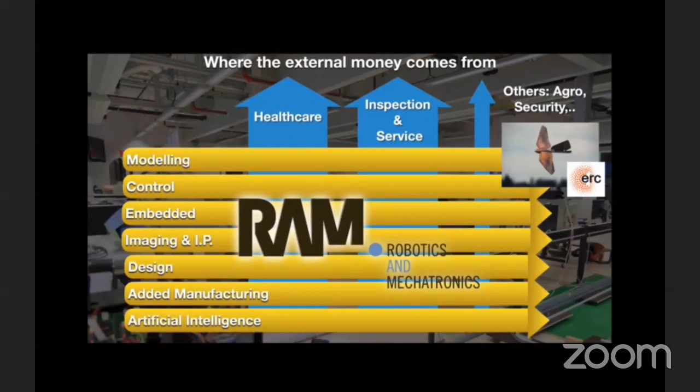This is a glimpse of the activity. We have a broad spectrum from very conceptual work to very practical work, completely domain independent - think general software architecture or conceptual system and theoretical developments - towards something very much related to a specific field, like if you work in the medical field you really need knowledge about the field itself. We have a lot of activities which have been recognized with awards and patents, from which we've also started a number of spin-offs. But I will not talk about this stuff in this lecture.

I want to first reference a colleague from Stanford to introduce what I want to talk about. Nowadays everybody's talking about AI, artificial intelligence, and very often the general public doesn't even know what it's all about. Already in '88, Moravec and colleagues from Stanford made the statement that it's actually relatively simple to automate things which humans think are very complicated, like playing chess or Go recently, but it's extremely complicated to create machines that can repeat very simple tasks that babies do when they are born.

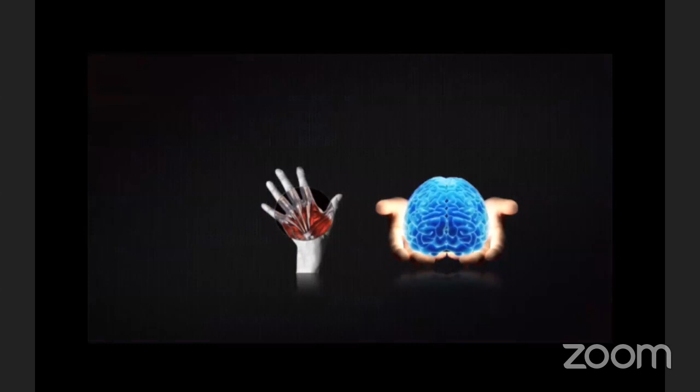And of course, the real sweet spot is what I call physical artificial intelligence, which is exactly the intersection of AI and robotics, where the two things, the computation and the physical interaction, meet.

Talking specifically about robotics, it has passed from its early stages in which we had machines that were stiff, high speed, and the environment was very structured, very far from human, to a situation in which we really need machines that are mechanically compliant. The design intrinsically has to be mechanically compliant. It doesn't have to be often very high speed — low speed is enough — but completely unknown environment and interaction with humans.

In order to tackle this kind of problems, you really need to think differently. You need new control strategy, new actuators, new materials, new performance measures. And the safety for human interaction starts becoming a major concern.

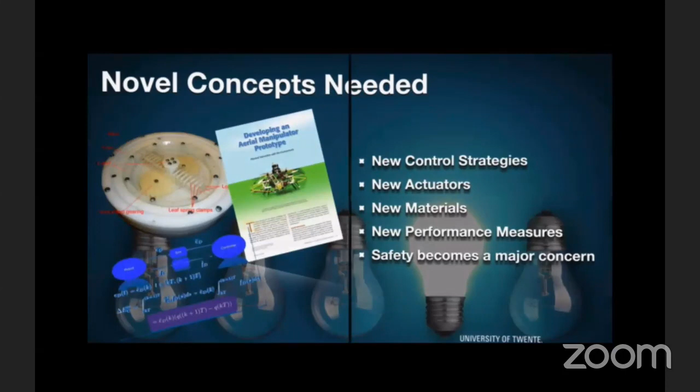And at the same time, if you look at birds — and I will come back to that later in my lecture — birds are amazing. If you compare this with some top planes that have been developed, like the Blackbird, which is probably one of the fastest planes available, it actually flies at 32 body lengths per second. A swift, which is a little bird, can fly at 140 times its body length per second.

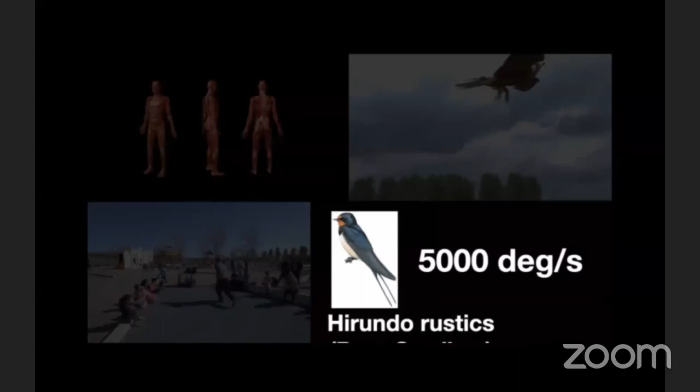And also concerning agility, if you consider the Douglas A-4 Skyhawk, which has a rolling rate of 720 degrees per second, there are barn swallow birds that have a rolling rate of 5,000 degrees per second. So you see that the way to interact with the environment — we are far from being close to having reproduced that.

So what I want to try to bring you is really a paradigm shift.

This is just a little game that I play all the time when I give this kind of lecture. This device is called the dovetail. You have basically two parts, the red and the gray one, which can move relative to each other. It's used in all kinds of appliances. You have 1 degree of freedom that's free to move. All the other 5 degrees of freedom are constrained, because two rigid bodies are connected by 6 degrees of freedom totally, which are constraints.

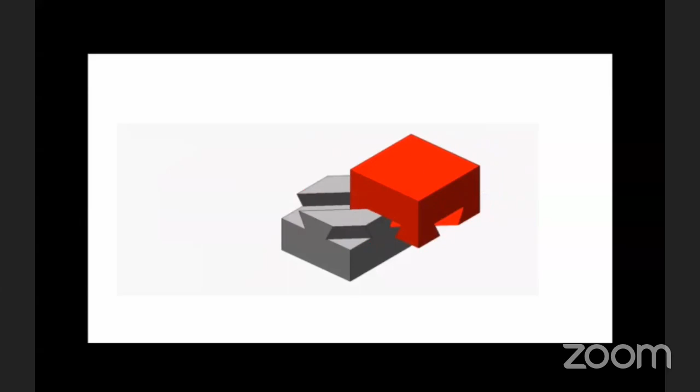So then I ask, most of the time: can these two parts now move with respect to each other, the red and the gray? I'm pretty sure a lot of you are thinking, oh, they cannot move like that. Well, it turns out that definitely is not the case — these two parts can move. And of course, I ask, besides the symmetric rotation of 90 degrees, are there other ways that this could move? And the answer is, again, yes — there are many, many ways this could move.

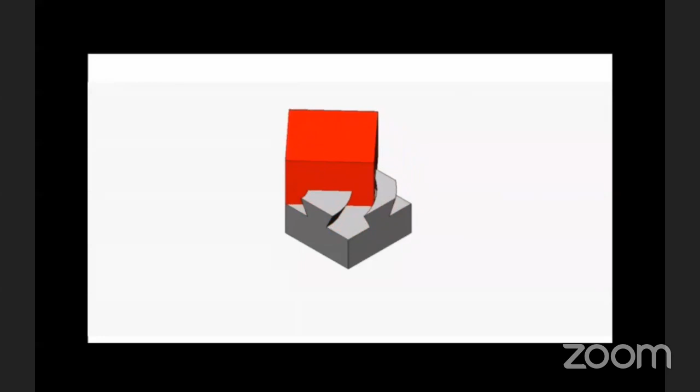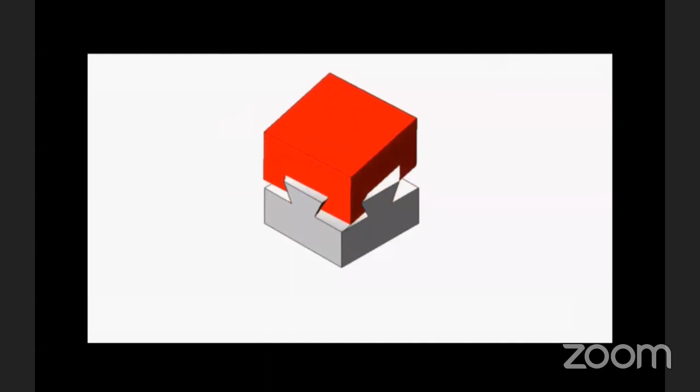For example, what you see here is one of the other kinds of motions, and actually there are many more motions that are possible. What I'm trying to show here — and this is yet another one — is that what I want you to try with this lecture is to break out of your patterns and try to think out of the box.

Because what happens in what I just showed you is that you see things, and you are trained in a certain way, you see things in a certain way, and it's very hard to get out of that way of thinking. So in the example before, by looking at the surface, you directly draw conclusions about the whole volume of the two objects, which of course are not the case.

So that is why I wanted to show you this. And what I want to talk about is interaction. So what if you want to model and control systems that interact with the physical world?

I would like to cite Ludwig Wittgenstein, who made a statement which is pretty well known: what we cannot speak about clearly, we must pass over in silence. This is something a lot of politicians should write on their bed, because a lot of statements are made without basic knowledge of science. But I mention it here because to talk about robotic soft compliance, interactions, impacts, and all the things I want to address, we must use the right tools and language.

And I am absolutely certain that physics-based, port-based, and energy-aware methods are the things to be looked at in this case.

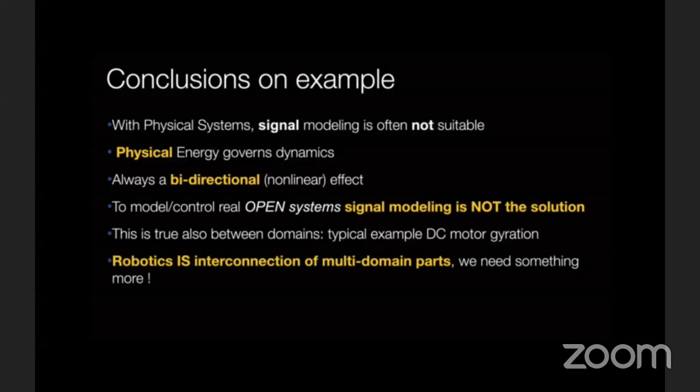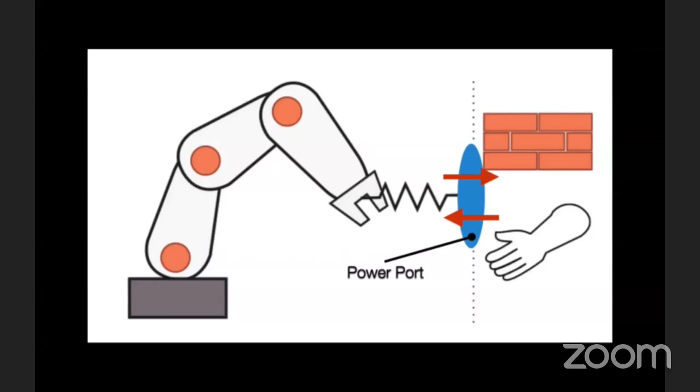And especially in robotics there is interaction of multi-domain parts, so you need to tackle things differently, and you need the concept of what is called port-based way of thinking. So this is a schematic idea of a robot, and the robot interacts with the world—it can be a wall, can be a hand. The power port is basically the concept you use to describe the interaction between the two systems, and as indicated here with the red arrows, it is always bidirectional. It can never be in one direction only. So what is a power port?

If you consider now a controlled robot and the environment it touches, these two arrows will be represented by what are called conjugate power variables, so forces and velocities. In the scalar case, it would really be a force and a velocity. In a multi-body case, this would be Lie groups, and I'll come back to Lie algebra in a second.

The environment is, in general, nonlinear, unpredictable, and greatly varying. But once the control robot touches the environment, the connection of the two systems becomes one single system. The stability, the dynamics, everything that happens is actually dependent on both. But very often we do not know the environment ahead of time. So how can we cope with that? That's what I want to show you.

More formally, a power bond: if you take two subsystems, system A and system B, these two variables, which are basically shared by the two, are called, in general, efforts and flow. They are two elements that belong to vector spaces in duality. If the efforts and the flow are scalars, there's not really big problems. But if the flows are, for example, vectors, the efforts will be linear operators on this vector space, so it's really a dual space. The efforts and the flow can also be infinite dimensional spaces, and duality is still well defined in that respect.

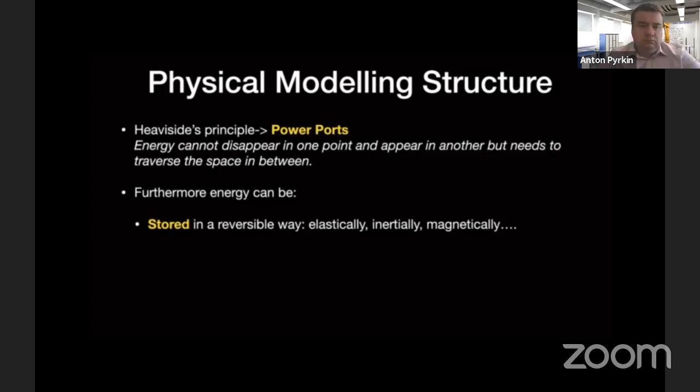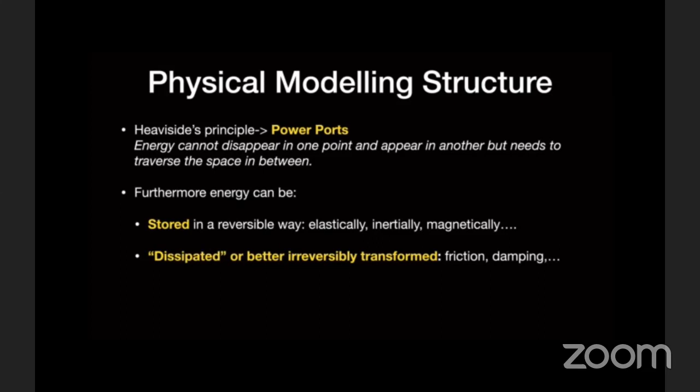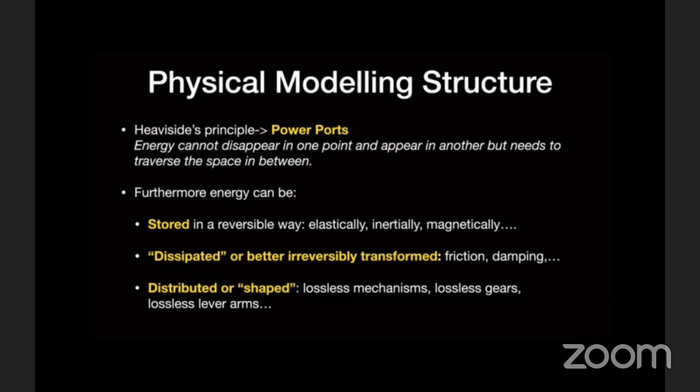Furthermore, energy can be stored in a reversible way — elastically, inertially, magnetically — or it can be dissipated, or better, irreversibly transformed. That's the concept of friction, ideal damping. Of course, energy itself cannot be dissipated, because by the first principle of thermodynamics, only free energy can be dissipated, which is a Legendre transformation of the energy. And energy can be distributed or shaped — mechanisms like transmissions, gears, lever arms are ways you can transfer energy from one part of the system to another, and the power continues. So in principle, the concept of distributed shaping of energy does not change the energy content.

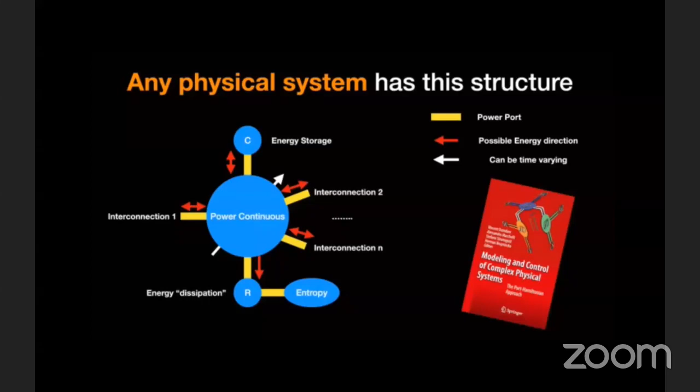So the water can come in and be stored there, or it can be irreversibly transformed to entropy. That's the R element, the dissipation, in which the water coming in cannot go back to the system and is basically stored in the entropy, which can only increase from a thermodynamic point of view.

Thanks to these things, you can model a robot or any complex mechanism as an interconnection of storage of inertia, for example kinetic energy, storage of potential energy, irreversible transformation to heat with dampers, and the rest will be interconnection.

Then you have open elements, and this is very important because it's the core I will talk about: you can couple this mechanism, this robot, to a motor, which will either supply energy or subtract energy. This is where the system will interact with the world—so there is a control port and an interaction port.

This system can then be simplified again to this blob of Dirac structure, an element which is storing energy, and an element which is dissipating energy, with two open ports which can be interconnected, in this case, to a motor and to the rest of the world.

Now I want to cite a conjecture, and this is the major point of the whole work I want to present: to ensure stability during any interaction, control needs to be implemented by interconnection, either physically or by control. There is no other way. This is the conjecture. Now let's try to understand what I'm talking about.

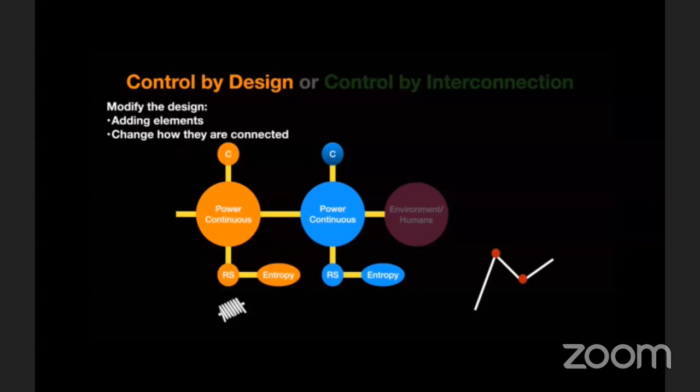In the schematic way I introduced, this would be to create another power continuous interconnection, putting other parts in which energy can be stored, maybe some other things which can be dissipated. This interconnection would then result in a new system—for example, putting a spring between these two links of this robot. This is one way to do control by interconnection; in this case, the interconnection is physical.

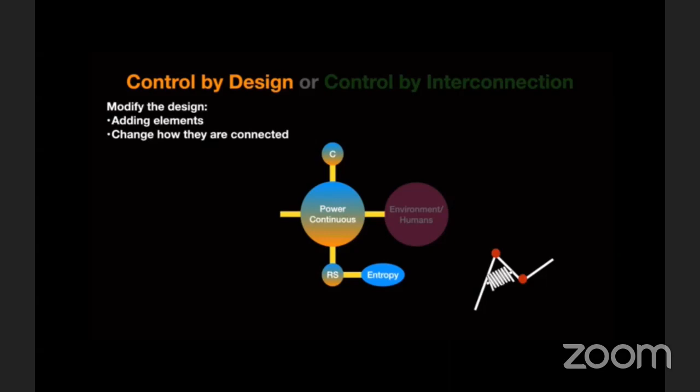Examples of this are given here. For example, this work we did with Sangbae Kim of MIT on the cheetah—one of the first designs of the cheetah—was to put a spring on the spine to create coupling between the locomotion of the front leg and the back leg and optimize the energy exchange. So you basically physically shape the robot itself. This is, by the way, something we are also doing with ITMO.

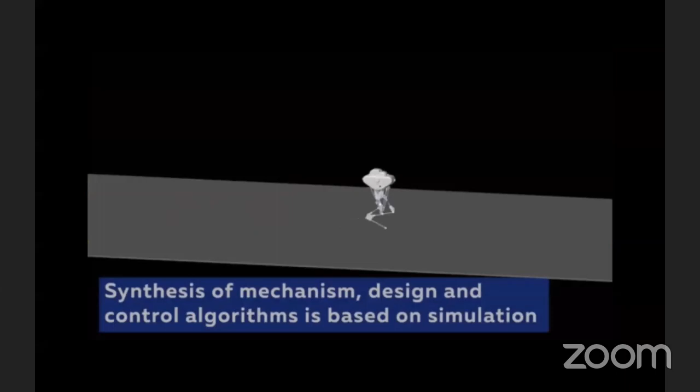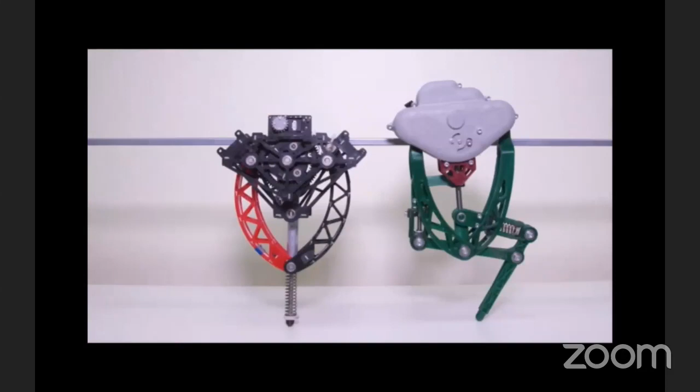So this is in the lab at ITMO. This is a design that we originally developed in Twente and has been adapted at ITMO. And this, what you see here, is developed only at ITMO. It's a very nice design in which you try to optimize it to create resonance of the oscillations. As you can see, this is the intrinsic physical design which will allow us to build a complete cheetah.

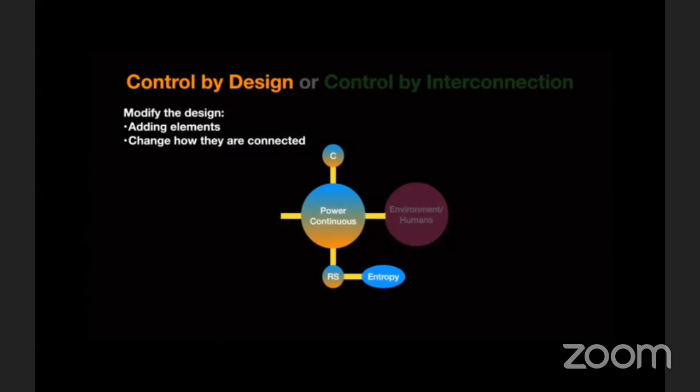So then, another way of doing control, instead of only physically controlling like this, is to say: you want, for example, to inject damping. Physically, you'd like to create damping in your system. You can easily put a physical damper, or you could build a device which extracts physical energy from your system. That energy, instead of just creating heat in a damper and being thrown away, could instead be extracted, stored somewhere, and then used again when you need it, because it would be a waste to just throw the energy away.

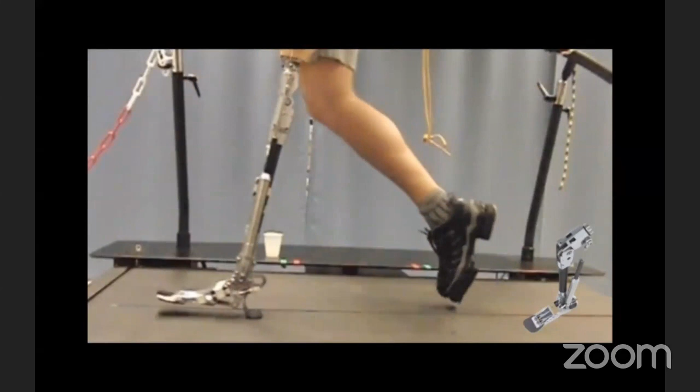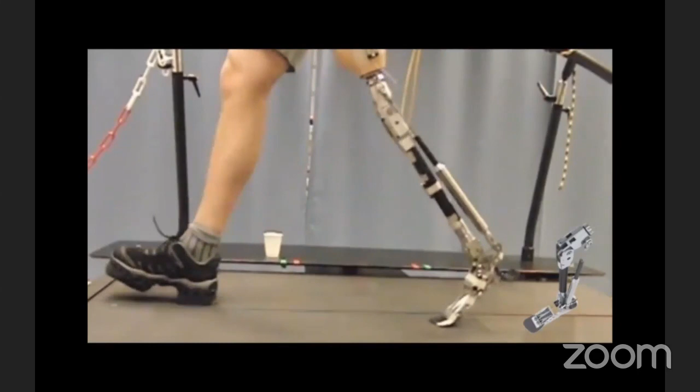This, for example, is what we developed in Twente many years ago: this prosthetic device, which is pretty unique in the world. You see this vertical element, which is basically an elastic spring. In this phase, the kinetic energy of the lower leg is stored elastically and then latched, and then in this phase it's used to create the push-off energy for locomotion. The patient, who is a transfemoral amputee, would recover 80% of the energy which would otherwise be lost. This is not done with any other knee prosthetic devices for transfemoral amputees that are out there.

So you can basically build a device where that spring behaves like a damper, in which, at the end, when it extracts all the energy, it just latches, and that energy is then reused as a storage injection of energy in the next phase when it's needed.

Another way of doing control by interconnection is by computation, right? You really want to put a controller that interacts with the system, but via the concept of the port as introduced before.

This is another topic I've been pretty active in, along with many other people active in robotics, which actually started in a European project coordinated by Antonio Bicchi, who I was part of. It was called VIACTORS, and publications in the world increased enormously during that time. Basically, variable compliance actuators are not just motors that transduce current to torque, but they can have physical internal dynamics in compliance and damping. For example, human muscles are kind of variable compliance actuators, because they have intrinsic compliance that can be modulated by the co-contraction of muscles.

Then, on the electrical side, you would have power amplifiers. And this is where things can go wrong. So basically, what happens if you have actuators, variable compliance or not, and you have power amplifiers, the power amplifiers suck the energy out of the power plug and put it into your system.

In principle, for the context of the control that we have, the energy which can be extracted from the power plug is infinite. So if you do not control the system properly, you can get instability, because the energy which can be extracted from the power plug and go through the line from the energy supply to the environment can be unbounded. And if you do that, you can have instability for the reasons said before. But of course, how much energy can be extracted is determined by control.

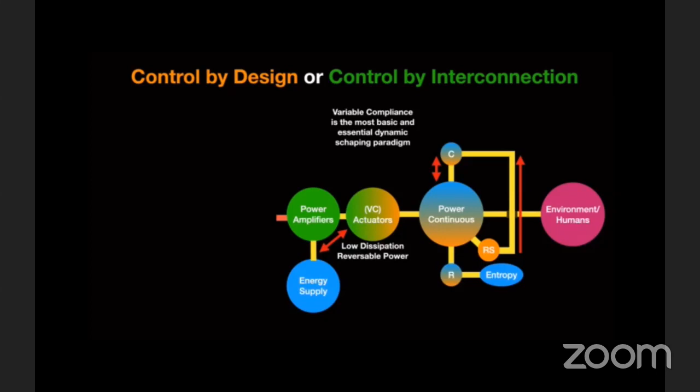So this is basically the power continuous system in which everything shown here is really pure energy. But if you go to the red kind of bonds, then you have control. Normally what people do is measure something in the system and then actuate the power amplifier. And this is, in general, not the way to do it, because you have no way of tracing how energy can be bounded and kept lower bounded from an energy supply to the environment.

So instead, what I suggest is to do it differently. Because what you want is that the virtual energy flow, which you can then compute via the red bond, should always be equal to the physical energy which you actually extract from the power supply and add to your environment. If you manage to do that, you can develop a controller that will have a lower bounded energy, and therefore prevent the environment from being able to extract an unbounded amount of energy and become unstable if something goes wrong.

So the first thing, of course, when you want to do digital control is the concept of sample and hold. And you need a way to handle this, because something can go wrong between continuous time and discrete time. It is very important to do it right at this very level, because otherwise you would lose this consistency purely due to the fact that you go to discrete time. There is a way to do that, as I'll show in a moment.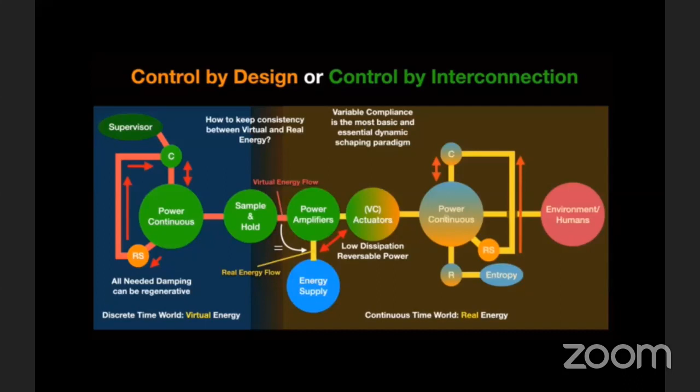Now, how can you do this? So this is the discrete time part. The gray part between the two is one important major issue, but it's very easy to solve. This is called passive sampling.

And the question is, of course, what should ED bar and FD bar be in order to keep consistency of the energy? This is the game. If we use a zero-order hold, we know that if our digital controller provides a certain value, that will be held constant for a sample interval. So we know that ED of t will be equal to ED bar of k, where k is the discrete time, for a certain interval.

Now, what is the quanta of energy that is then exchanged between the controller and the robot? Of course, the energy in the robot is physical, because you apply a physical torque generated from a current, and the physical energy comes from the power socket. But the physical quanta of energy will be nothing else than the integral of the power from kT to (k+1)T, and this will be the product of the two variables. But considering that we use a zero-order hold, ED bar is constant and can go out of the integral.

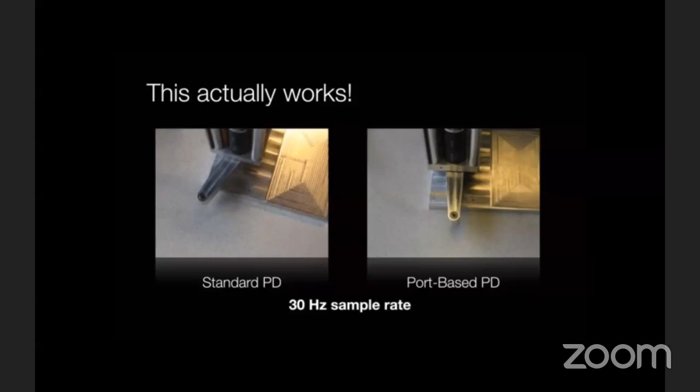And that's the key. So here what you see is something very simple that actually works. You have a 1 degree of freedom control system, kind of PD, done at 30 Hertz sample rate. On the left side it is done in the naive way using signal-based thinking, and on the right side it's done using the port-based concept. You can interact and things are perfectly stable because there is no spurious energy injected into your system due to sampling. This consistent way of sampling and actuation solves the problem at once.

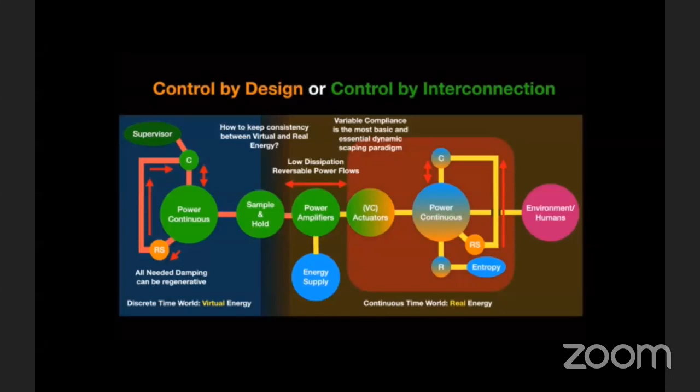Now, as I mentioned before, you can also put intelligence into your design, and this is actually the project Viactors that I indicated before. So you can basically look at the actuators and how to engineer the system and make it smarter on itself.

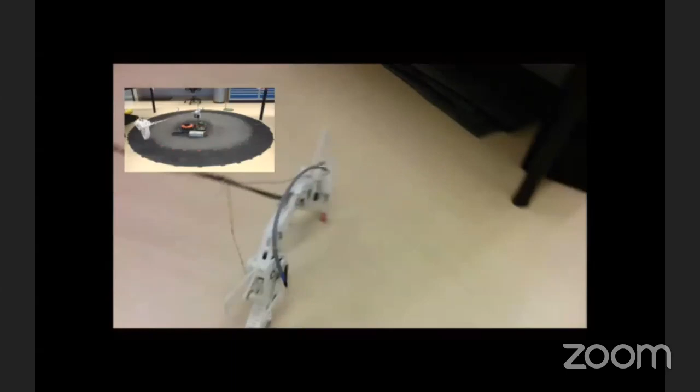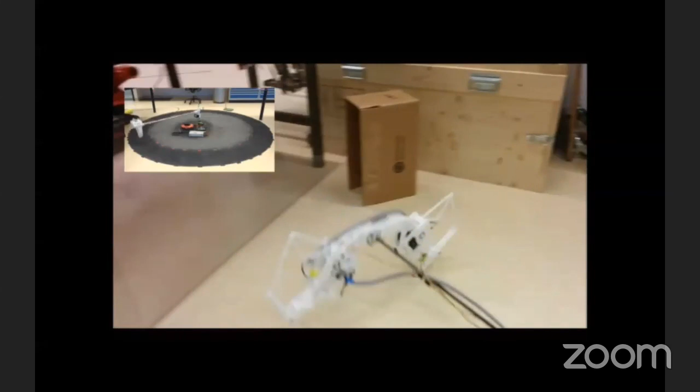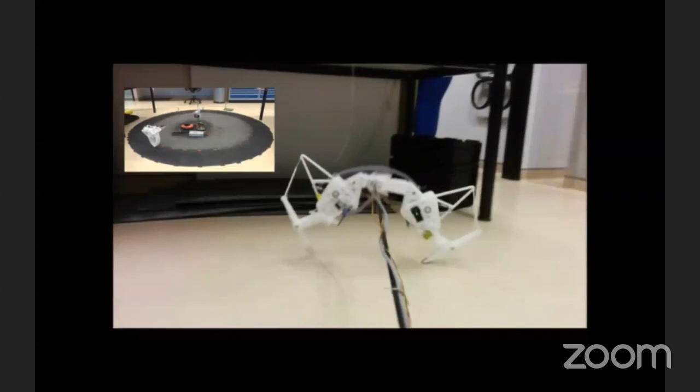And these are some of the things, for example, that we did in Twente. We are now, as I mentioned before, trying to build a quadruped version of this at ITMO, in St. Petersburg. This is a robot which actually doesn't have any control. It has a front side and a back side, with a little reaction control so that once the energy of the spring reaches a certain constant, it basically loads the spring again. There is a spine which is elastically loaded, and just by designing it properly, it can locomote forward.

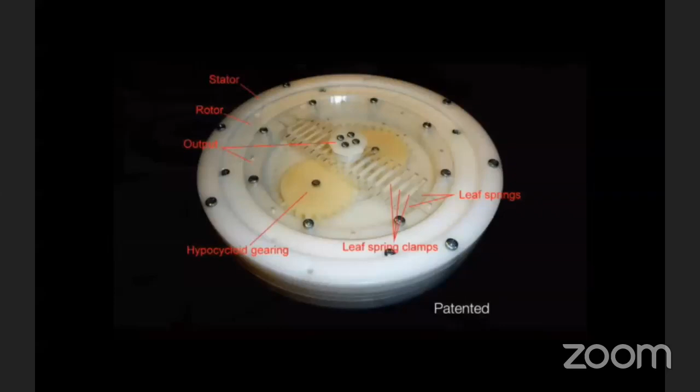You can also build actuators differently. This design depends on the flexure that you have, and it's able to change the stiffness just by, for example, moving what is called hypocycloidal mechanisms. You can then also make the clutch and release the way it moves. This is a patented actuator, a very nice design for creating variable compliance by means of design.

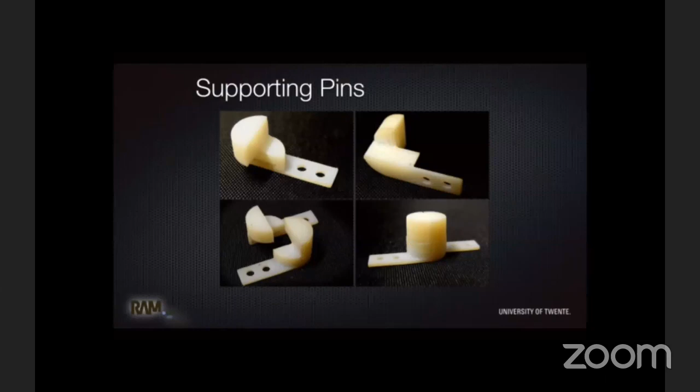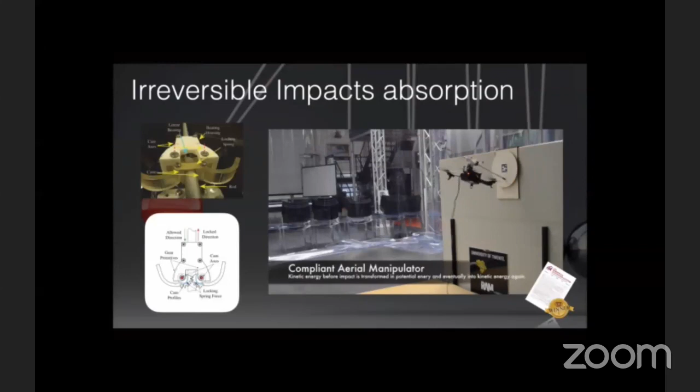And then you can also use smart design to basically create things like these drones, which actually interact with the environment and can scan vertical surfaces. So this is really a good example of smart design, or these things that can absorb impact, which was given the best paper award on Robotics Letters a few years ago, in which the system basically arrives at maximum speed without any problem, absorbs the energy, and can leave.

This methodology can be pushed much further, because with this idea you can basically solve intrinsically complicated problems in a very easy way. Suppose you have an environment - this is related to another project we run, SoftPro - in which you have a mechanism with a number of actuators, and these actuators have a bus in which they have different communication delays. You want to be able to control a very complicated system with a distributed architecture and prevent it from becoming unstable.

Well, there are ways to extend all this paradigm so that if you would build, for example, a humanoid - a very complicated robotic system with a lot of actuators - you would be able to ensure stable behavior with any passive environment in a certain way, even if you have multi-sampling, time delays, computational jitters, and all these kinds of things.

I have no time to go into it, but I just want to point this out because it really shows that these very simple ideas are actually solving problems that people think are still out there, by the way.

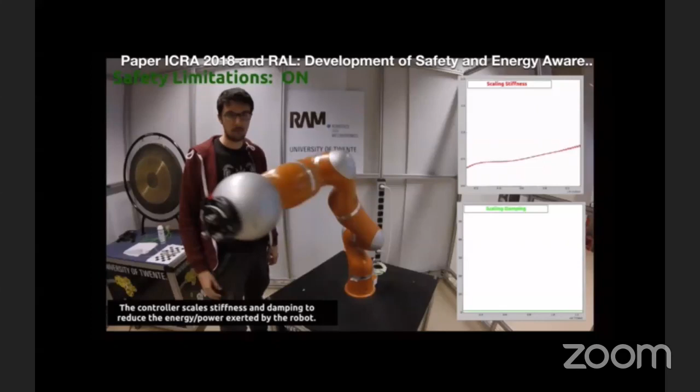What you can also see in the video, if you look it up online, it shows some other effects in which you can modulate the damping and the stiffness, making it very safe in all kinds of interactions to prevent any kind of problems.

This brings me to my conclusions. To be able to stably interact with an unknown environment in all situations, you need an energy awareness kind of methodology. To retain stable interaction with time delays, varying sampling, and distributed architecture, you really need a paradigm that makes that possible. The only way of doing it in all situations is using this port-based thinking and energy awareness. These techniques have been very successfully applied in very complicated robotic systems, for example at the DLR, one of the biggest labs in robotics in the world.

Now, what's next? As Einstein said, logic will get you from A to B, imagination will take you anywhere. And Leonardo da Vinci, already 500 years ago, was trying to understand one of the biggest beauties of nature, which is the bird's flight. As Aristotle says, in all things of nature there is something of the marvelous, and you can always learn from nature, from birds for example.

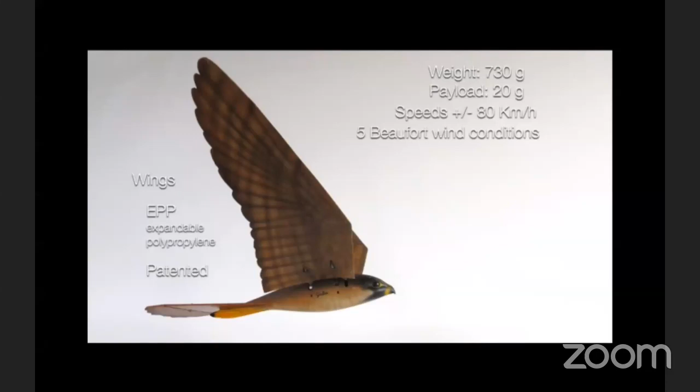We got the Tech Transfer Award, and the Best Paper Award of 2017 in a Robotics and Automation magazine, with the cover, and it is a pretty amazing system. We kind of understand more or less how it works.

This is a 2D CFD simulation in which you see that the vortices which are generated create what's called a reverse von Kármán street. Thanks to this vortex generation, you basically have jet streams that create the thrust for the system.

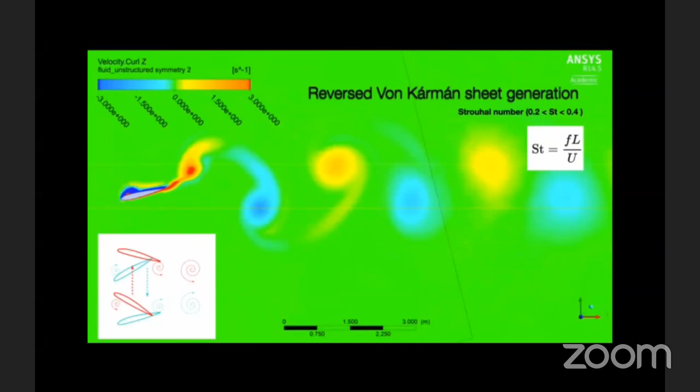All animals that actually propel themselves thanks to interaction with the fluid, like with fins or wings, they all have this kind of magic number called the Strouhal number, which is a well-known concept - a unitless number in fluid dynamics, which is about 0.2 to 0.4.

But once again, calling on Ludwig Wittgenstein, I think that we need to really look at the physics of it to understand it properly. We kind of understand why it works in 2D, but not in 3D. So you see in this slow motion of the mechanism that we managed to get flying, there is a big twist of the wings, and this big twist also gives rise to vortices which have a 3D nature rather than a 2D nature.

In fact, if we make these wings rigid and put them on the robotic bird, it would not fly. So this is great because it gives the opportunity - and I'm very, very happy that the European Research Council granted me an advanced grant of 2.8 million to look at this problem and solve it, to really decode how birds fly.

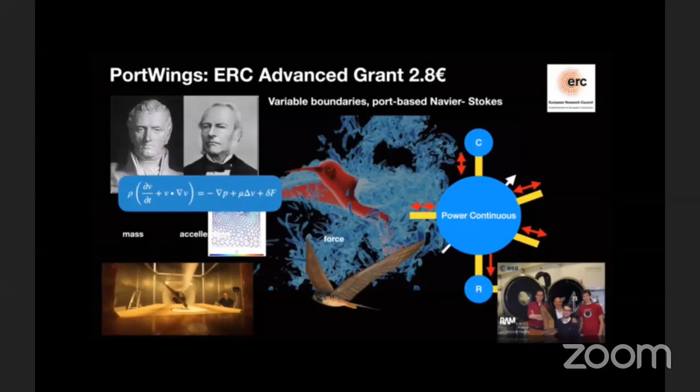The way we want to do it is exactly along the same line. This is, let's say, the standard form of the Navier-Stokes equation, which we will not use because we are completely rewriting this equation in a coordinate-free way. But it is well known that fluid dynamics, turbulence, and all these things are a very complicated subject.

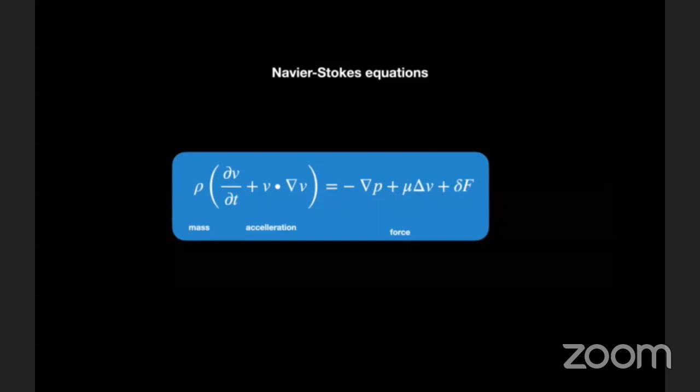And we need a new paradigm. As Robert Kennedy said, there are those that look at things the way they are and ask why. I dream of things that never were and ask why not. And we want to use this new paradigm of port-based modeling in order to solve this problem.

Basically, in a nutshell, what we want to do with this ERC is to model the bird by really looking at the interaction of various parts. So the interaction between the wings and the body and the tail is pretty simple. There are motions which are considered rigid body relative motions, and so far it's nothing new.

But things get much more complicated if you want to couple the fluid dynamics to the motion of the wings, which, by the way, moves within the wind and deforms. So you really need to extend those concepts of ports, not from finite dimensional Lie groups, but to go to infinite dimensional Lie groups. And then you need Grassmann algebra and other kind of very cool and elegant mathematics in order to study PDEs, partial differential equations.

And actually not only, but also the coupling of PDEs, which relate, for example, the fluid dynamics to the deformation of the wing in a bidirectional way. So the wind affects the deformation of the wings, and the wings, the way they move, they create and modify the flow. And furthermore, these two PDEs have a boundary in common, which is the layer, basically the surface of the wing. But this boundary moves within the state space because the wing moves within the fluid. So this thing is pretty complicated, but I think we will solve that very elegantly.

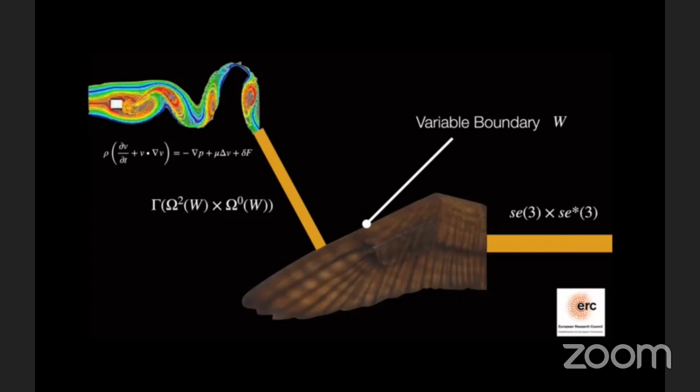And then you will have a way to really tackle things in a completely coordinate-free, interconnection, physically based, energy-based way.

Working in aviation, waste management, or agriculture, one knows that birds can be of great nuisance. Birds spread diseases, pick up waste, and pollute the surroundings. Nothing, however, tops the risk of bird strikes in aviation. Clear Flight Solutions has the answer to your problems: the Robird.

The Robird is an environmentally friendly solution for all your bird-related problems. It is a flapping wing robotic bird that not only looks like a bird of prey, but also flies like one.

We have many years of experience in unmanned aviation and bird control. Our certified pilots are experts in flying our Robirds. As safety is paramount, our Robirds are equipped with state-of-the-art autopilots, GPS, and geofence systems. We make sure that the pilot in command is always in control.

The instinctual behavior of birds when confronted with a predator is flocking together for maximum safety. By flying around the flock, the pilot can remove the birds lastingly in the direction of choice. Shortly after this, birds will start to recognize the area as a territory of prey and will start avoiding it. By mimicking nature, Clear Flight Solutions creates a unique bird control system that birds will never get used to. We make sure your skies stay clear.